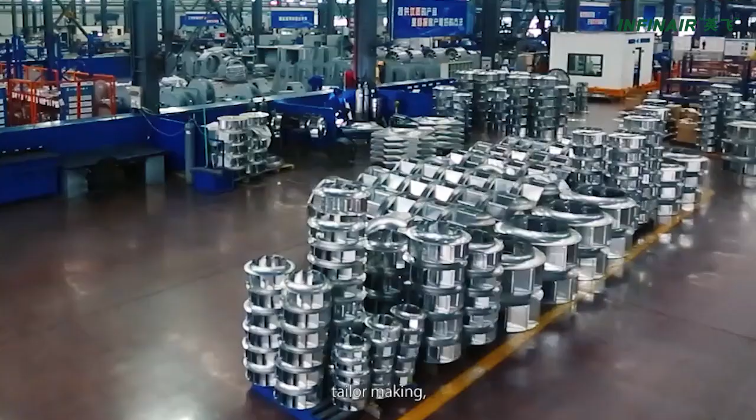Welcome to INFINAIR. Integrated with R&D, tailor-making, manufacturing, and international serviceability, INFINAIR provides you complete, high-quality ventilation and industrial process air solution.

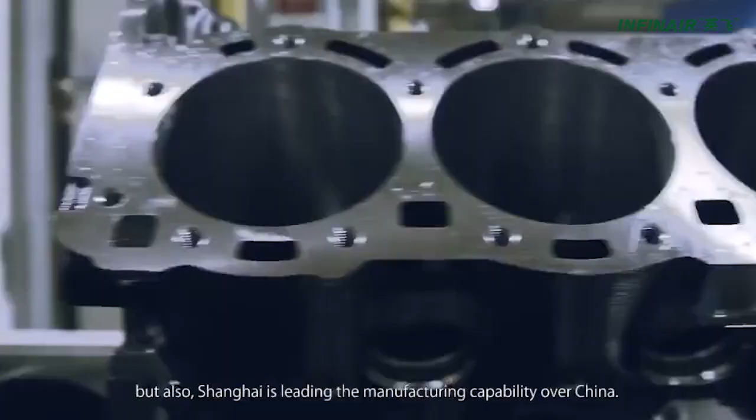Not only an international finance center and business hub, Shanghai is also leading the manufacturing capability over China. Please follow us to visit our immense 33,000 square meter manufacturing center right here in the dynamic and amazing global city.

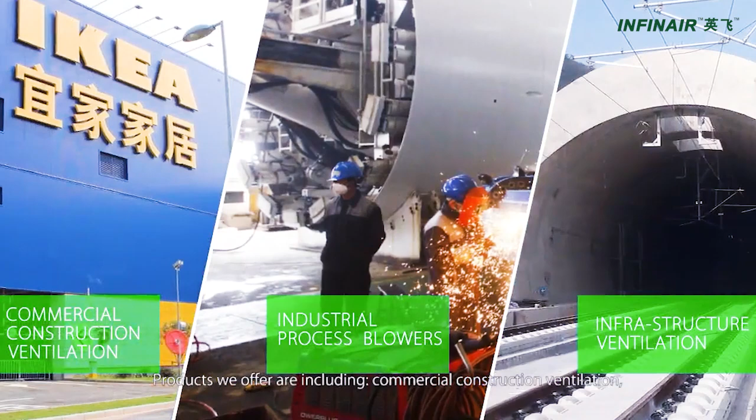Since 2003, INFINAIR started in a small workshop in Jiading, Shanghai. Now the modern R&D and manufacturing center are busy servicing customers from all over the world. But the dream of INFINAIR, extraordinary experience of customers, and happy life of family members has never changed.

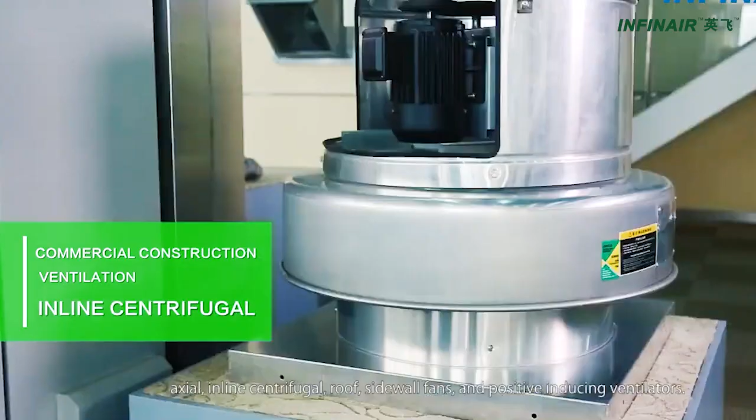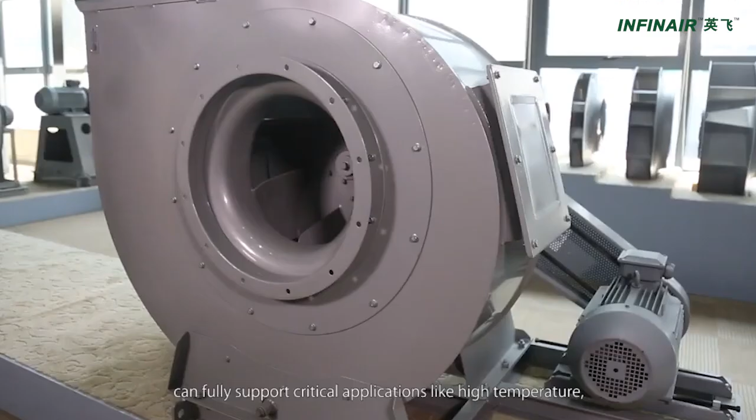Products we offer include commercial construction ventilation, industrial process blowers, and infrastructure ventilation. The commercial construction fans include axial, inline centrifugal, roof, sidewall fans, and positive inducing ventilators. The industrial process blowers we offer can fully support critical applications like high temperature, high pressure, explosive, and corrosive conditions.

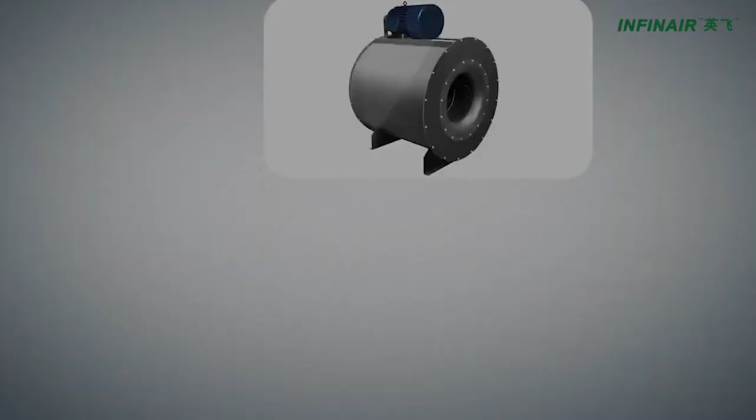The reliable and economic ventilation solutions for metro and tunnel applications are also products you can count on. The above complete product line provides one-stop convenience to you.

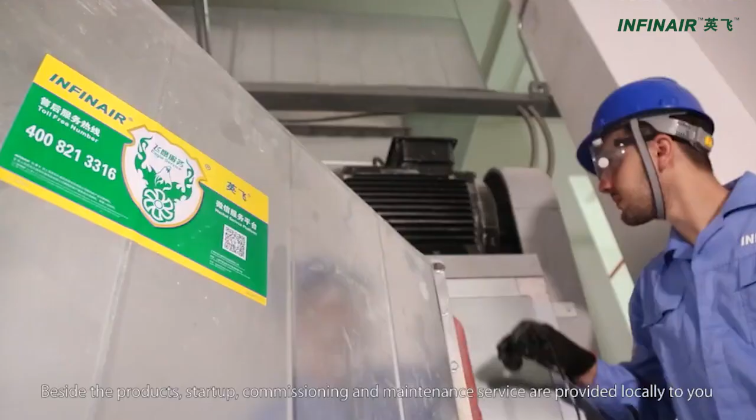Beside the products, startup, commissioning, and maintenance service are provided locally to you through our international partners in your country. We name it Eagle Service, which means right to the point, quickly.

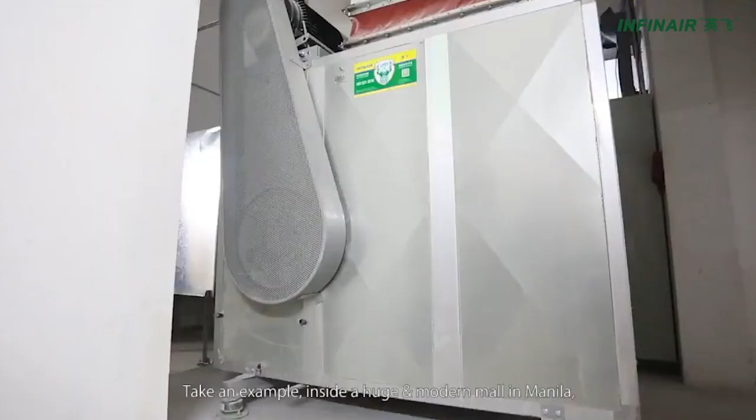INFINAIR Control Solution provides fan control cabinet design, manufacturing, and integrates the communication between the BA system and fans. Take an example: inside a huge and modern mall in Manila, INFINAIR provided underground car park ventilation layout design, all positive inducing ventilators, all the related control cabinets, and the system automatically controls the CO contamination in the total 6 floors of car park region.

Tailor making is also something meaningful. R&D ability is the core of product reliability. The 50 engineers of our R&D team have prepared more than 30 wheel platforms.

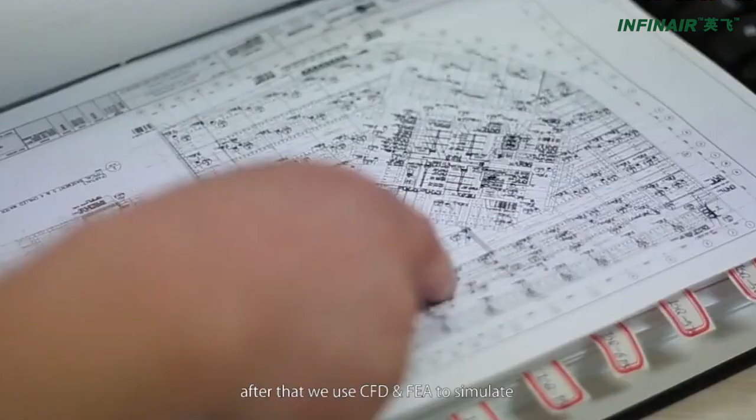This means we can quickly tailor-make a design for you without costing too much. The secret of how we achieve this is we choose one platform out of so many readily available ones. After that, we use CFD and FEA to simulate until we find the performance you required.

Maybe we need to modify blade height, blade numbers, or blade angle. Once it's done, we test the sample in the INFINAIR lab to verify everything is okay. The offer is ready.

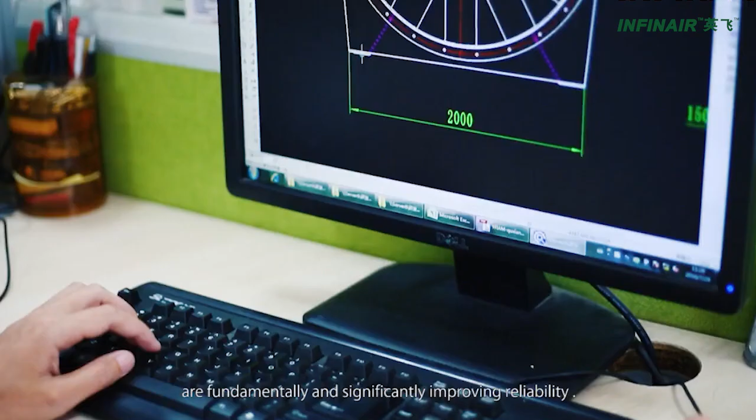Our CFD, FEA, and CAD technology are fundamentally and significantly improving reliability. As an engineer, I'm very proud that our products are widely certified by AMCA. Now I'm working on applying for more and more international certifications, which we believe are essential for you.

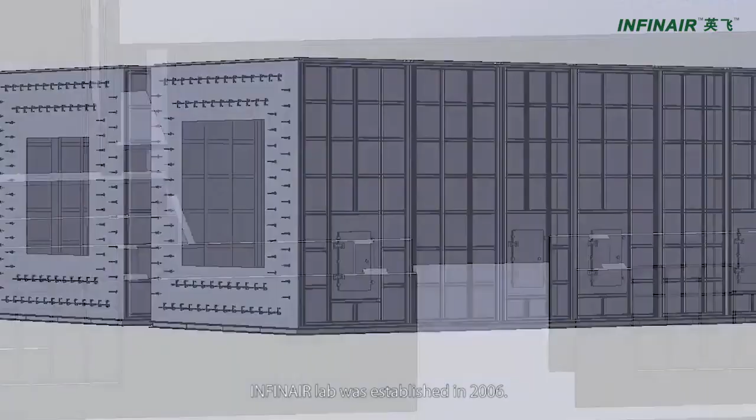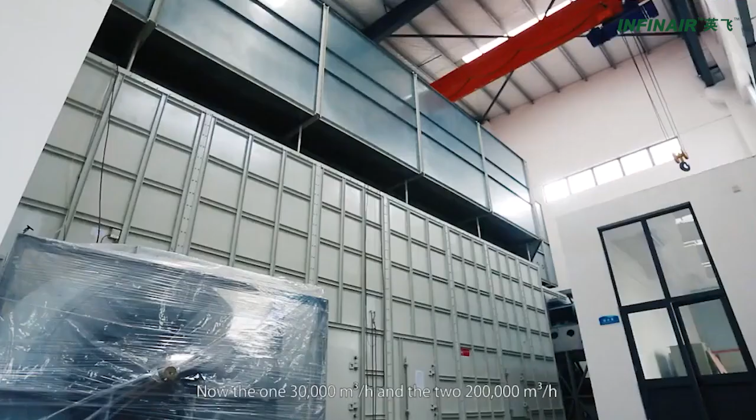INFINAIR Lab was established in 2006. Then in 2013, we reinvested over $2 million to renovate it. Now one 30,000 cubic meters per hour and two 200,000 cubic meters per hour super large-scale air chambers make the lab industrial leading and world-class.

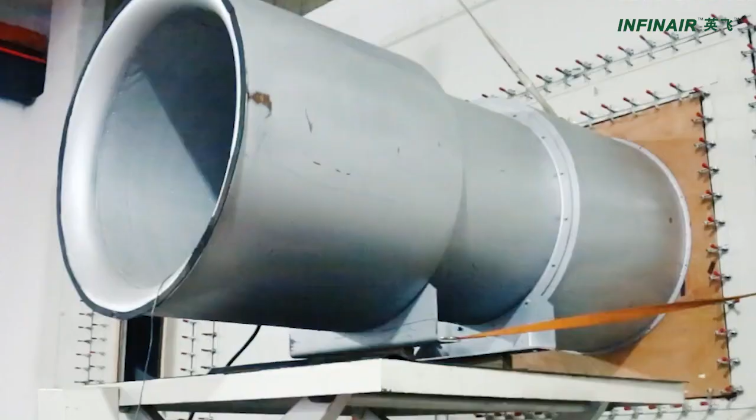INFINAIR Lab is the first lab in mainland China accredited by AMCA, and it is also listed as a nationally accredited testing laboratory by CNAS according to ISO standard 17025 by Chinese authorities.

Our product value proposition is reliable, convenient, and novel. Reliability is always our first priority. 5S, lean production, APQP methods, and Six Sigma system - we practice these every day.

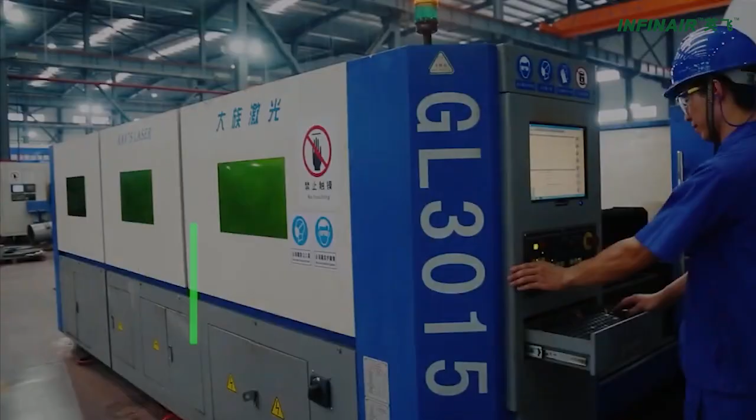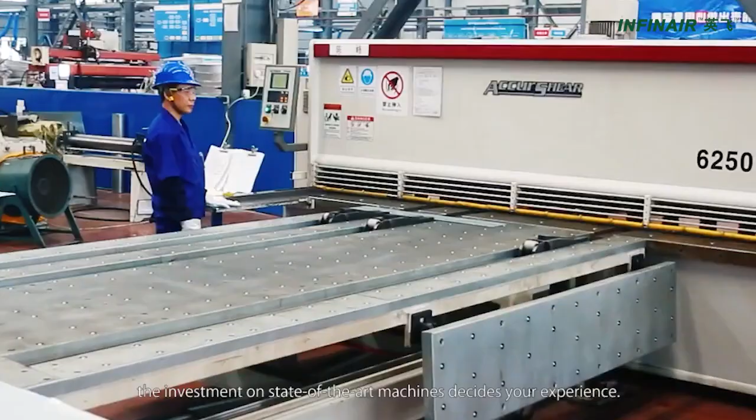Laser cutting, plasma cutting, robot welding, CNC lathe, CNC bending, CNC shearing - the investment on state-of-the-art machines decides your experience. Beside those, thousands of molds ensure the wheel platforms are right there to satisfy your needs. Such a large scale of product availability means convenient and quick solutions.

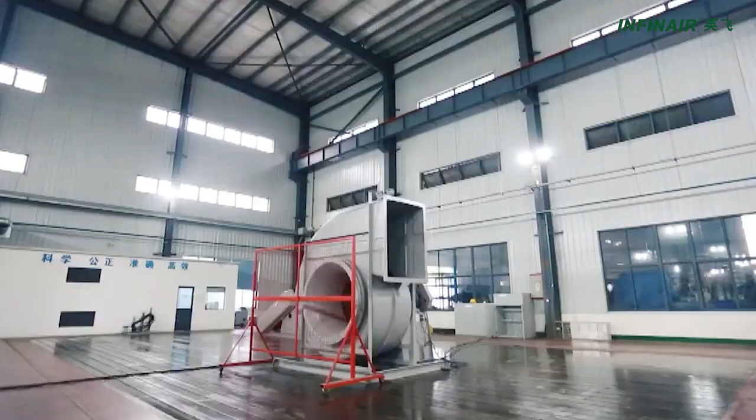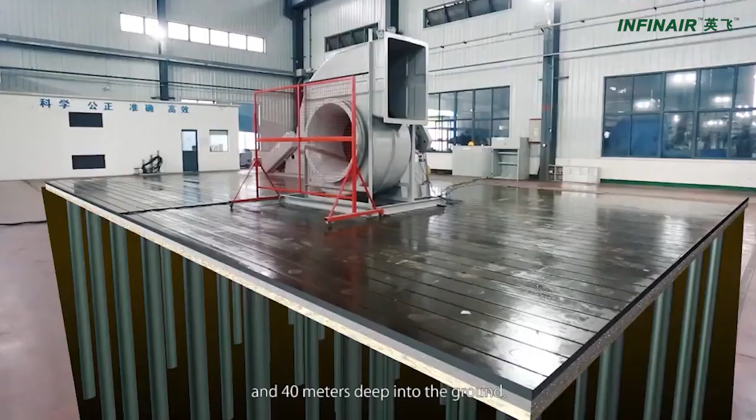Our vibration test bench is 18 meters long, 10 meters wide. It is surrounded by a vibration reduction groove, independent from the workshop foundation, and 40 meters deep into the ground. According to AMCA Standard 204, such a test bench is a must to achieve BV3 grade, a vibration grade, which means good product.

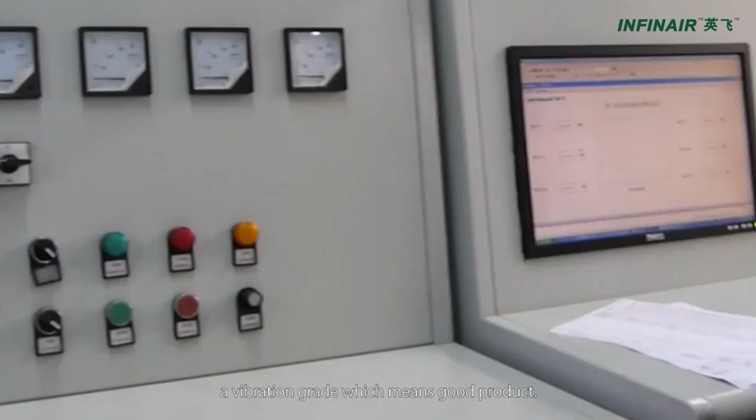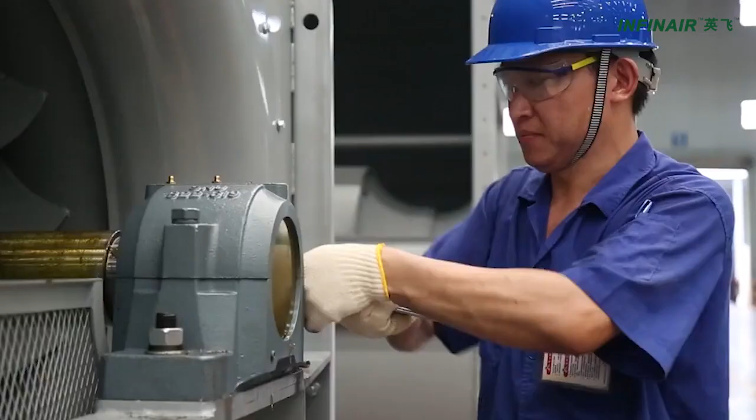Beside hardware, we believe the person, especially his spirit, is the key factor. Artisan spirit is something not just appreciated, but being rewarded in the workshop.

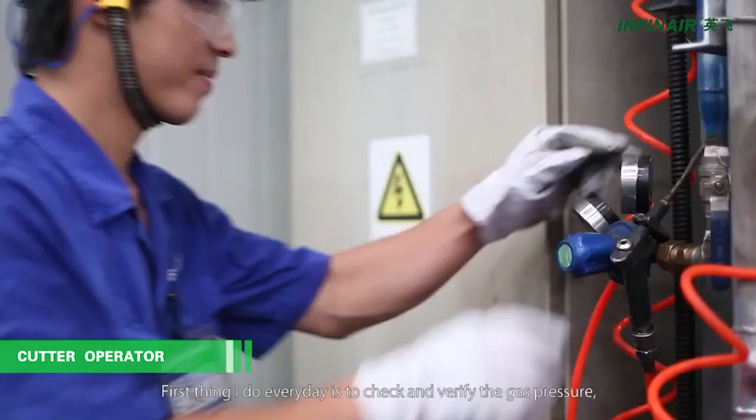Hello, I am an operator of cutters. The first thing I do every day is check and verify the gas pressure, electric current setting, size of nozzles, and the routing setup in the drawings.

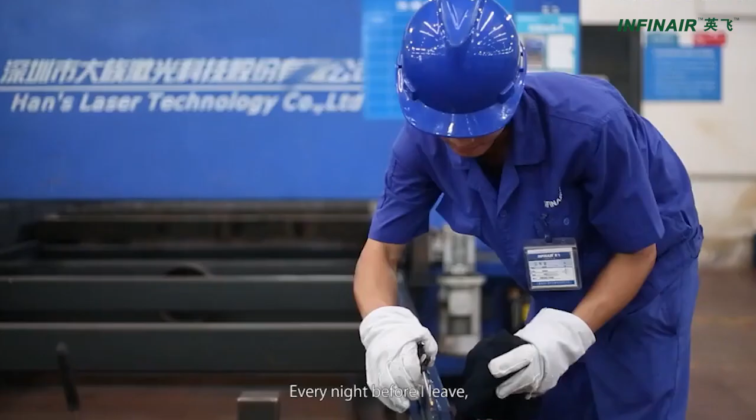Those tiny details decide quality. Every night before I leave, I clean the machine carefully - that's a habit of everyone in my team. I proposed an improvement suggestion to the company, and I feel happy that they gave me a bonus for that.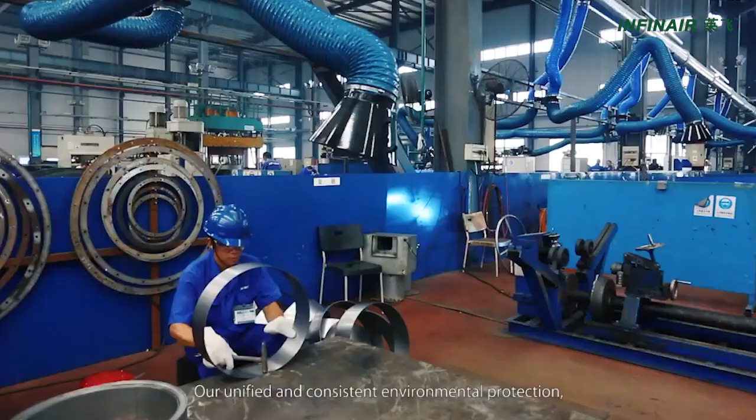INFINAIR is an ISO 9001, ISO 14001, and OHSAS 18001 certified company. Our unified and consistent environmental protection, occupational health and safety management systems minimize risk of casualty accidents and occupational diseases, guarantee property safety, and improve work efficiency.

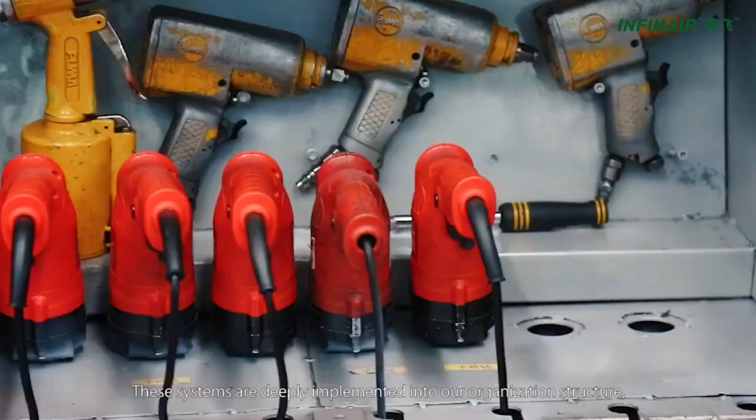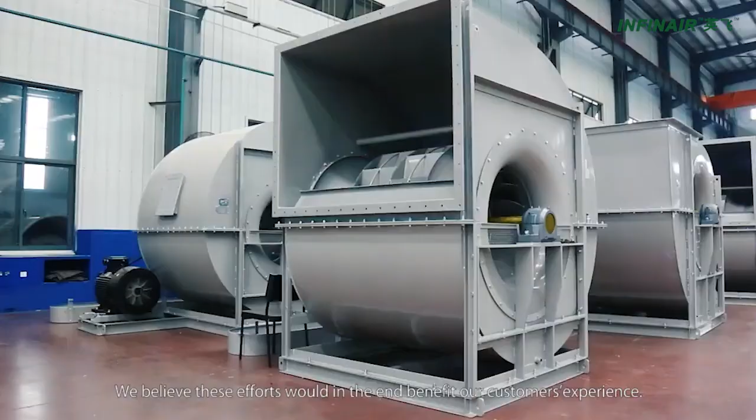These systems are deeply implemented into our organization structure, planning, activity, responsibility, working rule, procedure, and processes. We believe these efforts would in the end benefit our customers' experience.

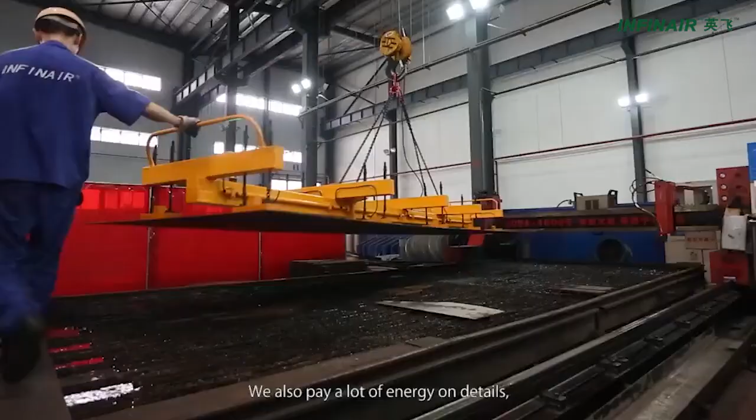We do care about your experience. That's why we focus on value - the R&D, product availability, the delivery, the noise, vibration, and efficiency. Those are the values. We also pay a lot of energy on details, because all you see, you hear, you touch are from details.

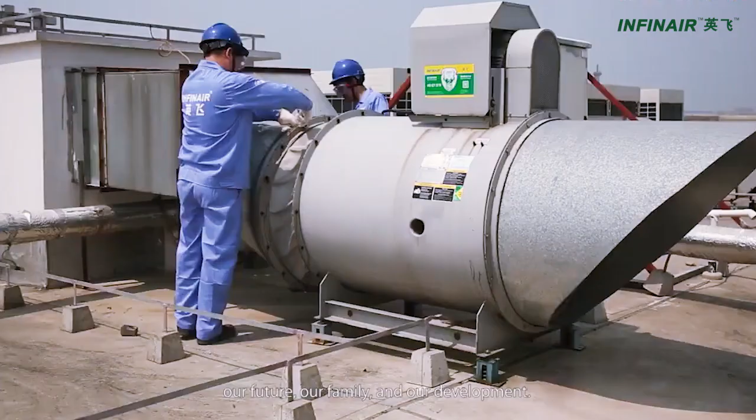How can we achieve that? I transformed the company into a platform. They are partners of INFINAIR business. So your satisfaction is directly related to everyone - our future, our family, and our development. That's why we care. Your extraordinary experience is our goal.